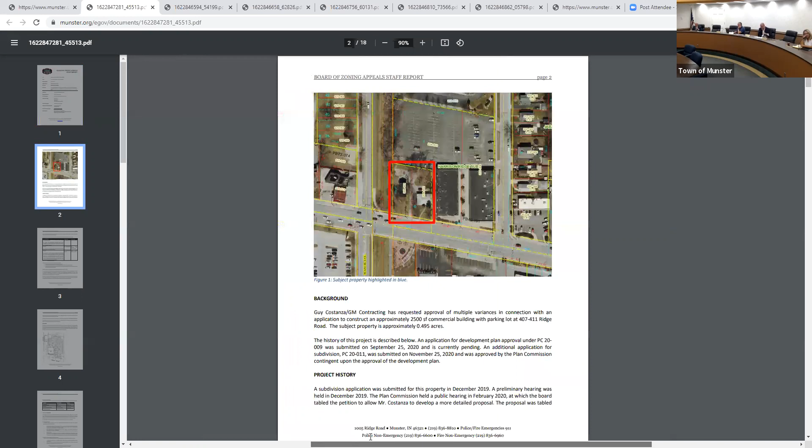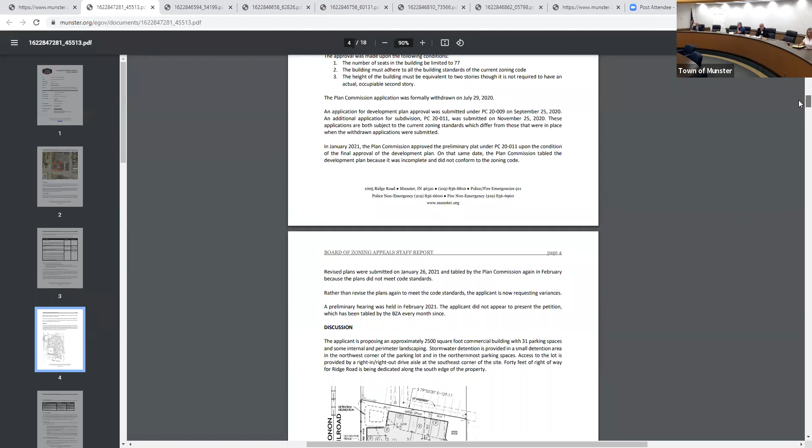The project was then brought to the Plan Commission and was not approved. In fact, it was tabled multiple times at the Plan Commission level, and then ultimately withdrawn from the Plan Commission in July of last year. A few months later, the project was resubmitted for approval to the Plan Commission.

It was noted at that time that there were a number of additional variances that would be required to build the project as proposed. You'll see here it's approximately a 2,500 square foot building located on the southwest corner of the lot with a parking lot.

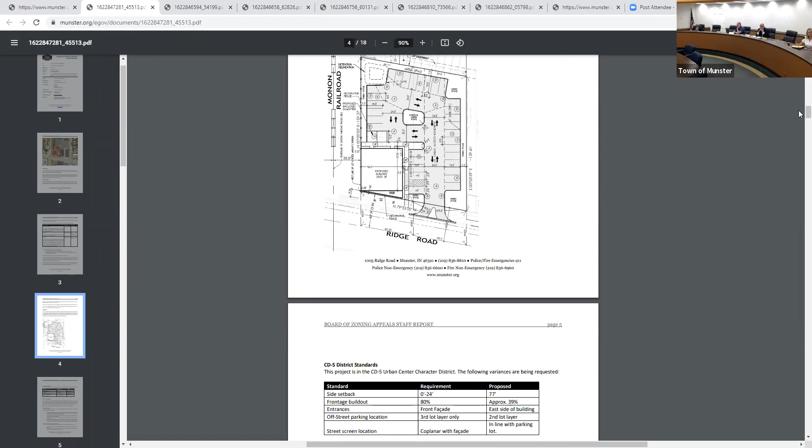The variances they're now requesting are from the maximum side setback, which is 24 feet. They're proposing a 77 foot setback on the east side of the building.

They're requesting a variance from the frontage build out requirement, which in this CD5 district is 80%. That frontage build out requirement is the percentage of the front lot line that is built out with the building, so the proportion of the front lot line that has a building adjacent to it. They're proposing approximately 39% frontage build out.

They're requesting a variance from the requirement that the main entrance of a building be in the front facade. They're proposing that it be on the east side of the building.

They are requesting a variance from the location of off-street parking, which is to be in what's called the third lot layer, 20 feet setback from the front facade of the building. They're proposing that they have parking in the second lot layer instead, which is shown here, essentially that 20 feet from the front facade back.

And finally, they're requesting a variance from the location of the required street screen, which is a screen of the parking lot and parking area. It is to be located co-planar to the facade, so if you draw a straight line across the facade, as you can see here. They're to have a street screen located right here, but in the landscaping plan they submitted, they proposed that it be here instead.

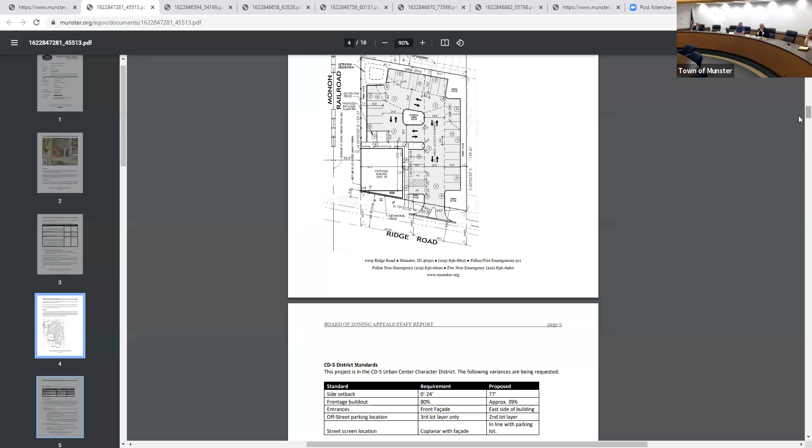So those are the variances being requested. As I said, at this time it's a preliminary hearing, so the applicant would be requesting a public hearing at the next meeting of the Board of Zoning Appeals.

I've listed for you the standards by which a variance request should be judged. As a reminder, any applicant for a variance is required to address those criteria.

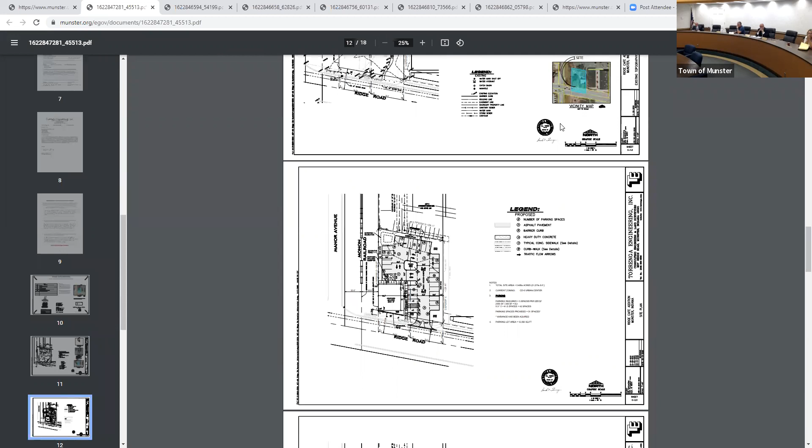I'll go ahead right now and just put the screen to the project site plan, and I'll just let you know that both the applicant, Guy Costanza, is here in the room, and he's being represented by Attorney John Reed, who is present on Zoom.

Okay, so the petitioner wishes to speak, or the counsel, Mr. Reed, wishes to speak? Yes, thank you, Mr. Chairman. This is John Reed on behalf of GM Contracting and Mr. Costanza and Mr. Krantz.

So the two proposed tenants for the building at this point are Little Italy, a restaurant located in Dyer — they want to put in a to-go facility with no live seating, basically a large kitchen with a to-go operation — and also a Domino's delivery carryout facility, roughly 50-50 of the building.

So the prior variance granted for parking limits us to 77 seating positions — maybe there will be 8, if any. So I think that's all helpful, but we think we can meet the criteria, hopefully, for the variances we'd like to see granted on the property.

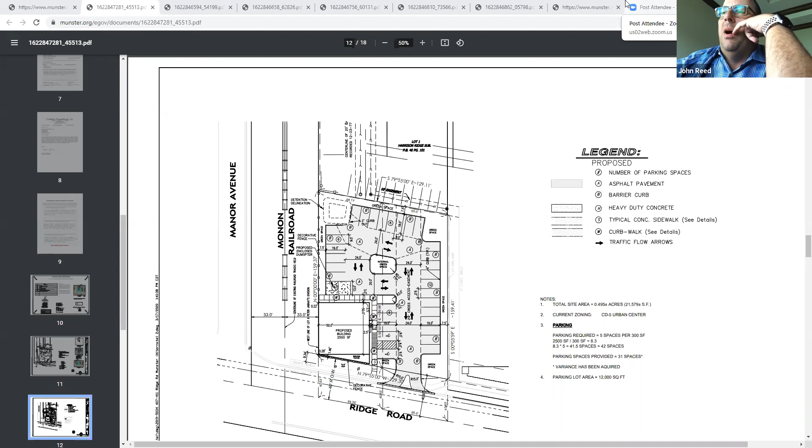And then ask for site plan approval thereafter. Really, I guess tonight's meeting is to get everybody back in tune with the project, and simply make a request from the Board of Zoning Appeals members to please place us on the schedule for the July 13th hearing date.

Thank you, Mr. Reed. Thank you. Are there any members of the board that would like to ask any questions?

Mr. Chairman, I have a question. Regarding parking, the second lot layer as opposed to the third lot layer, does the town see that as a problem with this use, or maybe a future use, with traffic backing up? People coming in and out of that entrance, as you pull in, there's no buffer zone whatsoever. You're pulling right off our apron and making a turn to park right in the spot, and cars backing in and out are the same as traffic trying to pull in there.

Mr. Raffin, if I might jump in - Tom was kind enough to meet with us last week, and we did discuss that exact issue. We're going to be pushing those first spots back, because now we're actually over parked. You can never really be over parked these days, but we'll be able to move those spots back so they don't intrude on the ingress egress. I agree that would be difficult, backing out where people are pulling in isn't very helpful.

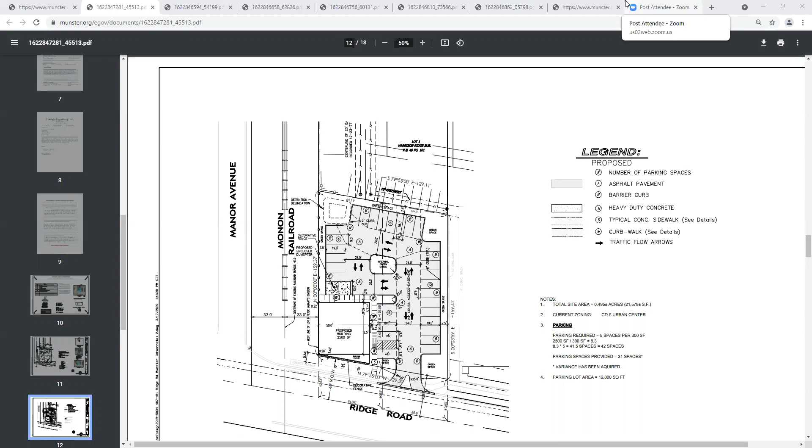Thank you, Mr. Torrenga. Does anyone else on the board have any questions of the petitioner, or comments? If not, I'll entertain a motion to set this matter for a public hearing.

Mr. Chairman, I make a motion to set this for public hearing and that petitioner comply with all town's notice requirements. Is there a second for that motion? Mr. Chairman, I'll second the motion. Thank you, Mr. Peterson.

I will call for the vote. Tom, would you please call for the vote? Sharon Mayer, yes. Jonathan Peterson, yes. Roland Raffin, yes. Chairman Friedman, yes. Very good, the matter is now set for public hearing.

We're going now to the second item on the agenda. The second item is BZA 21-004, the Good Oil Company requesting a conditional use permit. Tom, would you explain to the board what is happening here?

Good Oil Company, owner of the property at 9451 Calumet Avenue, is requesting two things, and this docket number as well as the next one are linked. They're proposing to reopen a car wash at their Marathon gas station at 9451 Calumet Avenue. There are two actions associated with reopening the car wash. The first is this docket 21-004, an application for a conditional use permit. A car wash is considered an auto-oriented use in our zoning ordinance, and in a CD 4A district, which is where this is located, that is a conditional use.

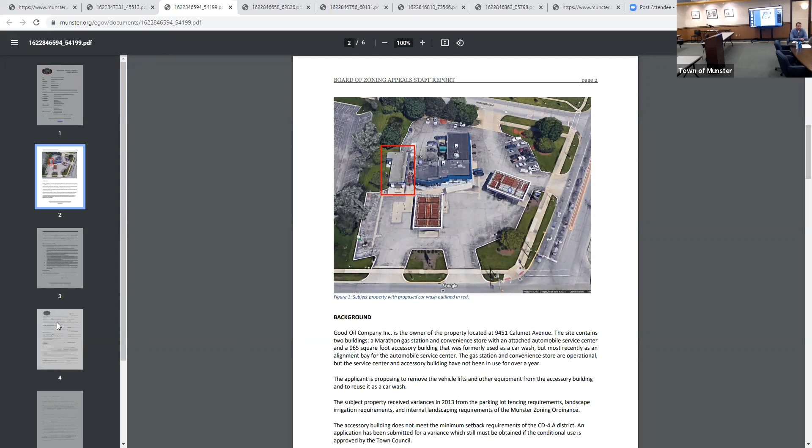If it's okay with the chairman, I'll briefly describe the variance involved as well. Not to jump the gun, but the building itself does not comply with the minimum setback standard. So it's also going to require a variance. An accessory building is to be located in that third lot layer, 20 feet back from the front facade of the primary building. This is essentially at the same setback, so it doesn't comply with our setback standards, and it has also expired as a conditional use.

A conditional use is a permitted use under certain circumstances, listed here in the staff report as the criteria for approval. The Board of Zoning Appeals needs to determine whether or not these conditions are met with this use, and then make a recommendation to the town council—favorable, unfavorable, or no recommendation. A public hearing is required for this action, and that would be the request tonight: to grant a public hearing.

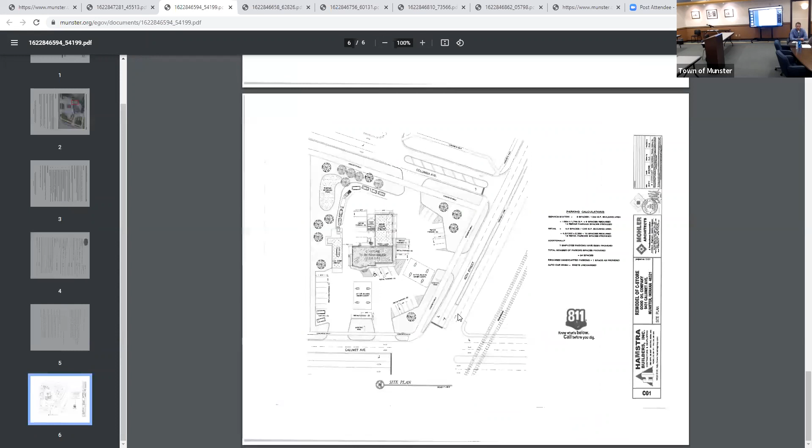I will show you one more exhibit, which is the overall site plan for the property. This is a site plan that was approved by the Board of Zoning Appeals some years ago in connection with the development plan approval. As you can see, because it was formerly a car wash, the site still is such that it can accommodate the car wash. There's substantial stacking space for cars, and there's sufficient access from Calumet Avenue and Columbia Avenue to the site.

So they're not proposing any additional improvements beyond just the interior remodel of that building into a car wash. That being said, I do believe we have representatives from Good Oil on Zoom, if you'd like a presentation or to hear anything further.

Thank you, Tom. I will allow the petitioner to speak. Please identify themselves and tell us what you would like. Thank you, Mr. Chairman. Can everybody hear me? Yes. My name is Justin Schramm.

I'm the corporate attorney for the Good Oil Company. I also have with me here Chuck Ryan, our Chief Operating Officer for the Good Oil Company. I want to thank everybody first and foremost for your time this evening.

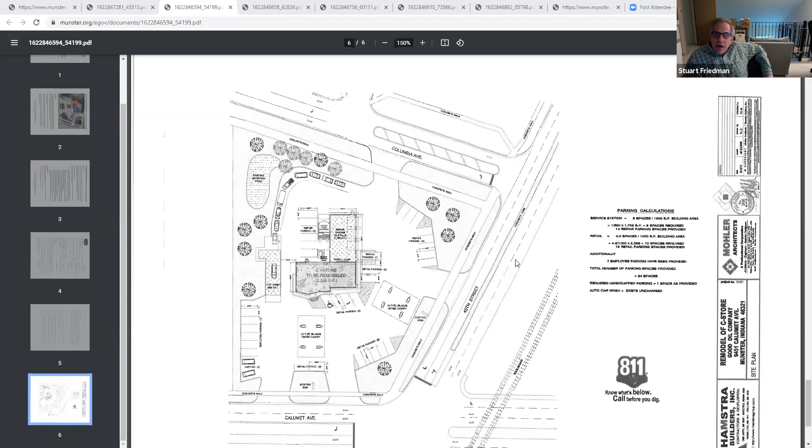So I have a question. I haven't been by the Marathon site since they changed 45th. Are you still selling gas from that site at this point? Yes, sir. Okay, so it's your intention to operate the car wash facility and dispense gas? Yes, sir. Okay, I just wanted to clarify that.

Mr. Chairman, I've got a follow-up question to that. I thought I heard Mr. Ryan say they're planning on tearing the facility down and rebuilding completely. Why are we doing this tonight? We have a dated rendering. It sounds like they're just testing the waters here, and what they really have in mind is something completely new. Why don't we just cut to the chase?

Mr. Ryan, if that's what you're planning, why don't you submit a rendering of what you're contemplating so we can look at it and decide whether to approve it or not. I think let's just go straight to what you're intending rather than come at this from half measures.

Well, we're in a contractual obligation there with a lessee that has four years left on the contract. We don't have the ability to take it over as the Good Oil Company. Once that occurs, then we would, but unless we can figure out if the lessee can survive there without the car wash, we can't survive the way it is right now. It'll just linger on.

So for us to be able to determine whether it has the value to raze and rebuild it, that's 4 years down the road. So there's really not a point to that at this juncture.

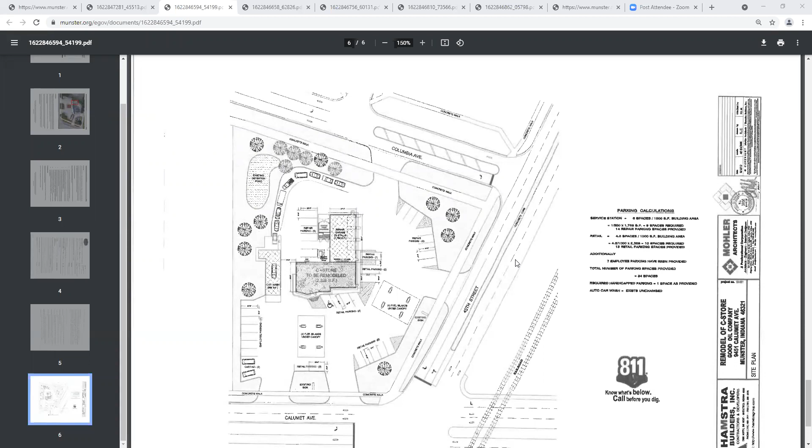I don't know that we portrayed this as a gem. I think one of my first statements was that we realized there had been activity in the past, and especially to the site plan committee - I think Tom can probably attest to that - we understand there's things that's happened on this property that quite frankly isn't conducive to our business model, a family-owned business, and we want to do better. We do. You've undertaken a lot of cost, expense and time, and even the fact that you're sitting there in that room having this discussion with us is a testament that you want to better this area.

So again, it's something we've talked about. If it's a conditional improvement of use for a year period or 18 months, to show that we can follow through and improve the property, I think we'd be amenable to that. But again, we do understand that there has to be some trust that needs to be earned back. We realize that. Thank you.

You don't earn that trust after 18 months and the car wash conditional use is taken away. Would you recommend taking down the structure and restoring it to pavement or landscaping?

Well, it's certainly something - I don't want to bind the executive committee because we do everything by majority vote, but it's certainly something that could be a matter of contract. If the only way this is going to be approved is conditioned upon improvements to the site, and if that doesn't happen there are certain conditions subsequent that'll need to happen, then that's something we can include as a matter of contract. Again, I would defer to your legal counsel on whether we can do that. I've not dug into the subject specifically, but it's something we would be happy to take back to the executive committee and see what type of commitment we would make to do that.

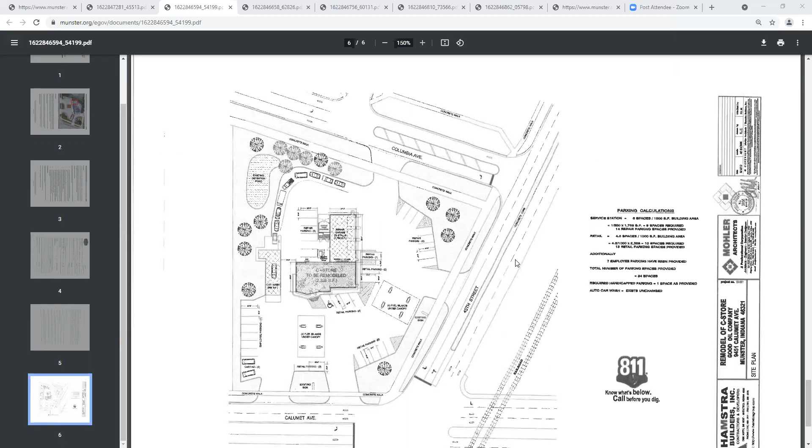I'll entertain a second for that motion. Is there a second? Mr. Chairman, I'll second that. All right, then I call for the vote. Tom, would you recite the roster, please? Sharon Mayer, yes. Jonathan Peterson, yes. Daniel Buxa, yes. Roland Raffin, yes. Chairman Friedman, yes. Motion carries.

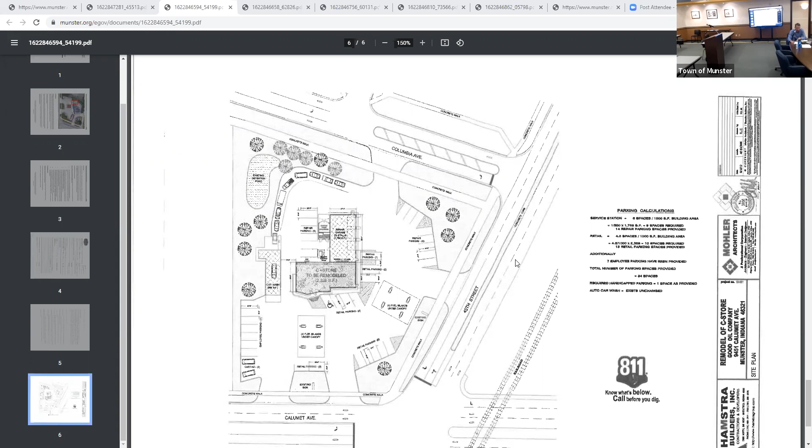And just to clarify, that covers two separate public hearings: the first for BZA 21-004, which is a conditional use permit request, and secondly BZA 21-007, which is a request for a variance from minimum setback standards.

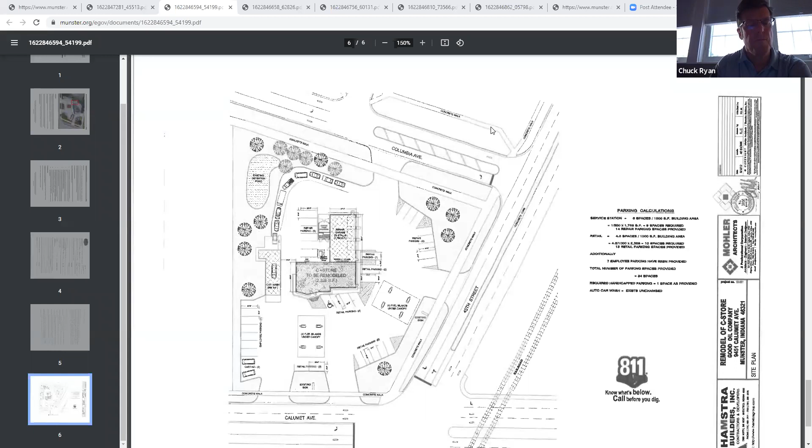The next item on the agenda is, I believe, Smoothie King, Mr. Parth Patel. This is BZA 21005. Tom, would you explain what this is all about?

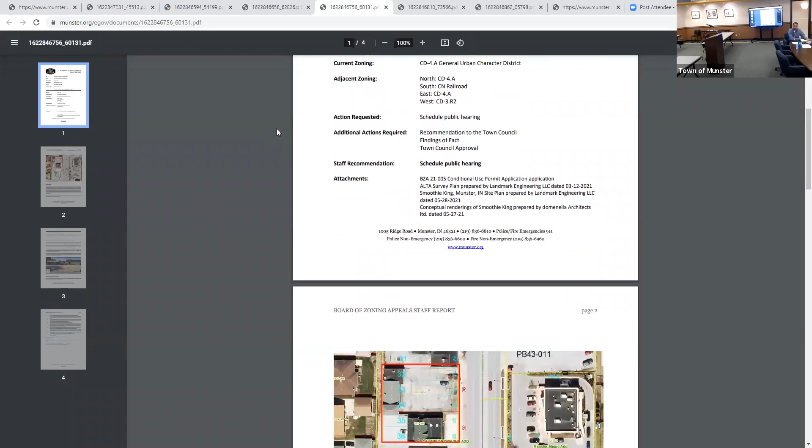Yes, similar to the last two items on the agenda, there are three related items related to a single project, which is the redevelopment of 8130, 8138 Calumet Avenue — I'll apologize, there's an error in the agenda, it says 830 to 138, so that's a typo there. In any case, this project is a proposal to consolidate those two lots and construct a single Smoothie King restaurant on the two lots with a drive-through and a small parking lot.

There are three applications connected to this. The first is for a conditional use permit for a drive-through in the CD4A district — a drive-through is permitted, but only under certain conditions. The second is for two variances: the first from the minimum parking ratio, and second for the maximum number of curb cuts. And then the third application is for a conditional use permit for an outdoor dining patio. So the conditional use permits each have their own unique sets of criteria.

The variance is a different set of criteria, but in any case...

The site is located here, 8130, 8138 Calumet Avenue. Currently there are two vacant buildings. This building is the former Soul Spa, which has been vacant for many years, and this is a former Munster Animal Hospital. Both properties are owned by Bruce Boyer. The applicant is Parth Patel, a developer who I believe has a contract to purchase the property.

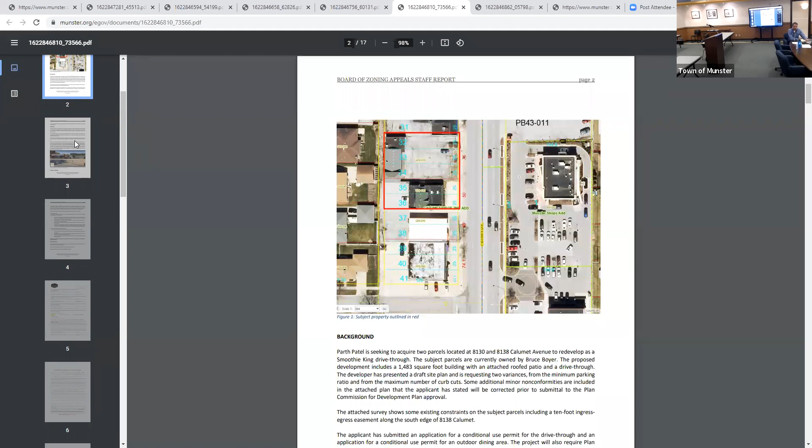I will go through each of these petitions and describe them a little bit for you. Let me pull up the site plan.

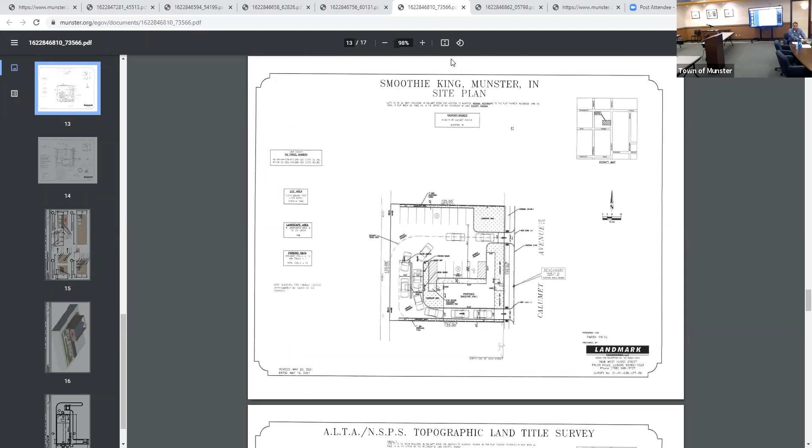The proposed site plan has a small building located on the south part of the site, with a covered patio area extending off the northeast corner. There are two curb cuts. The north curb cut is entrance only off of Calumet Avenue. Vehicles enter, line up in two queues to place their orders, and then exit along the south side of the building onto Calumet Avenue.

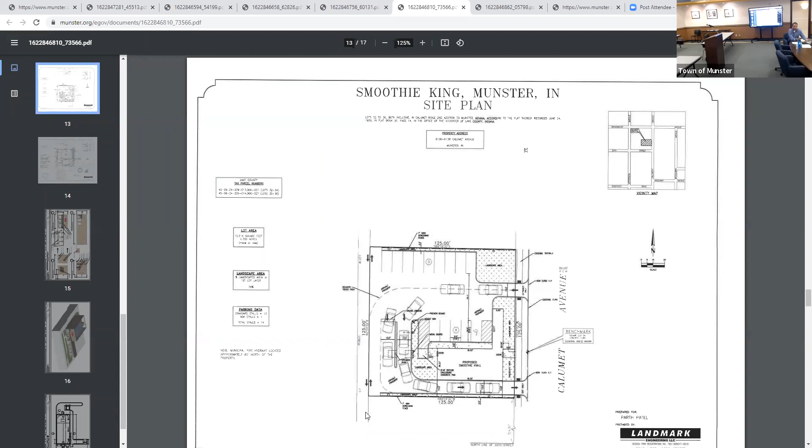There are a few items to note on this site plan. First, there's a proposed exit to the south along a town-owned alleyway, which runs parallel to Calumet Avenue up to 30th Street. And then there's also a 20-foot... I see this is actually not the most recent site plan that has been provided. Let me see if I can pull up the most recent one.

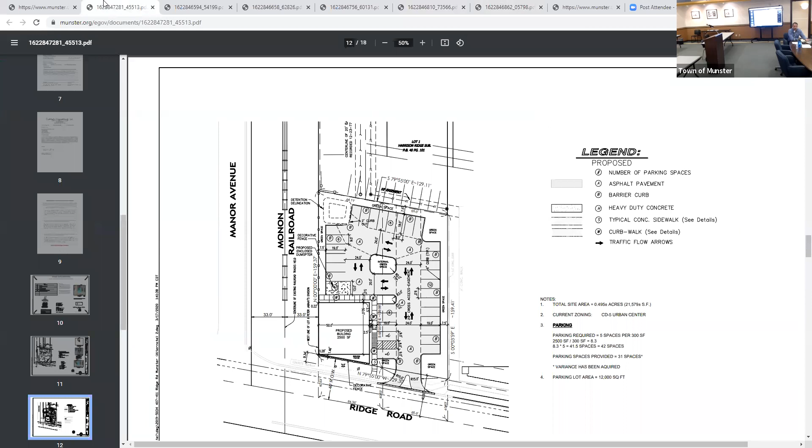This one—because I'm not seeing the correct one here.

There's a 20-foot easement as well along the south side of the property, 10 feet on the applicant's property and then 10 feet on the property to the south, and that's for a shared driveway.

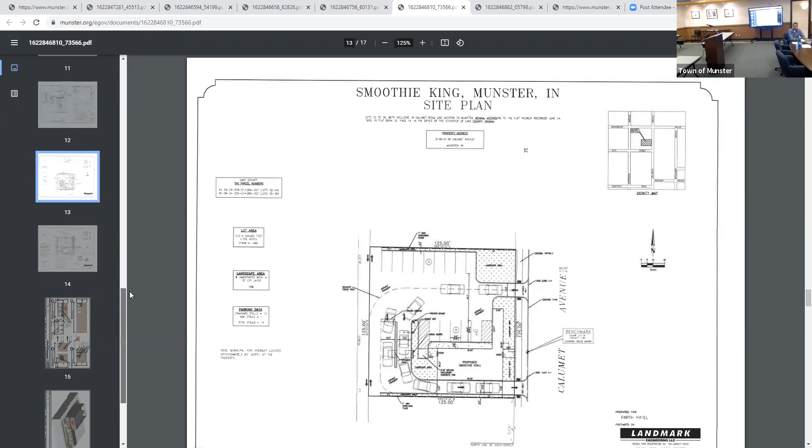So the proposal is—I'm sorry, this is actually the wrong site plan that I'm showing here. Let's see, it's one of the other ones.

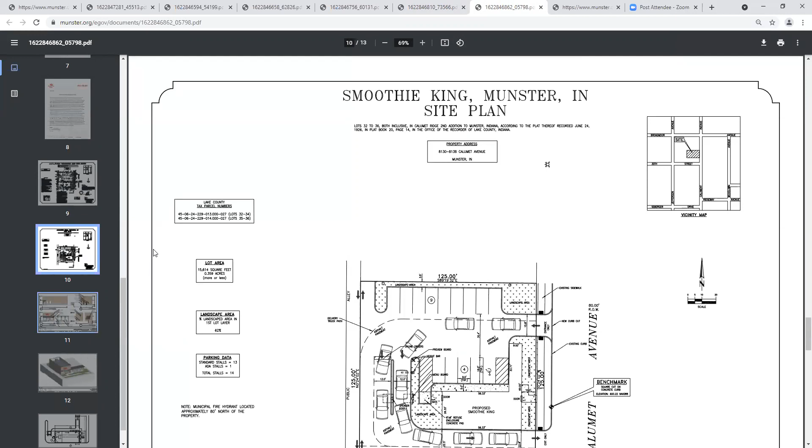Tom, is the one you're looking for dated May 28th, 2021? Or should it be June 7th? Yeah, it's literally a brand new one that I sent to Tom a day or so ago. That one didn't get put onto the agenda because it was sent this week, but this is the most recent site plan. I apologize, one of the staff reports has a previous version.

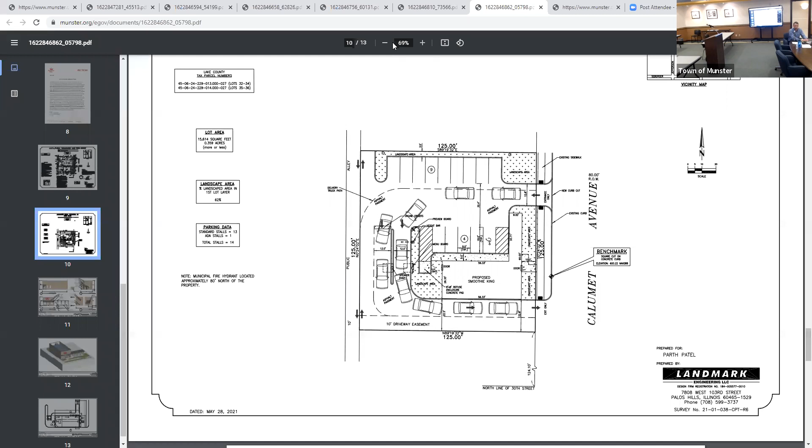Pull it up, Tom, so I can see. Tell me what changed as you're going through it between the ones that we have and what you have. So this is on the website, it's just under one of the other staff reports.

I'm looking right now at the staff report for the conditional use for the outdoor dining patio. But again, the building is here. The thing that's changed from the other site plan is that this one shows a 10-foot driveway easement along the south edge. So there's a 20-foot driveway easement total, 10 feet on this property and 10 feet on the property to the south.

So the plan shows the exit of the drive-through not on that easement, but on a dedicated drive aisle exiting out to Calumet Avenue. This remains clear as a bypass lane. What you don't see here, which is on the site plan sent this week, is the other 10-foot easement on this property. So the plan hasn't changed, it just shows that easement and the building to the south.

So what you have here is a 32-foot driveway.

That being said, there are variances being requested for the number of curb cuts, which in this district has a maximum of 1—they're proposing 2. There's also a variance being requested for the number of parking spaces. They're proposing 13, and the required number would be 24.

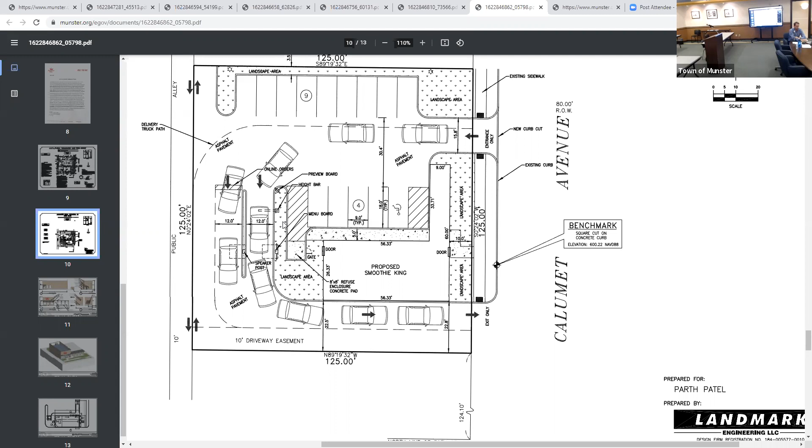Now, the applicant has provided some additional information from his other stores that I'd like to explain today, which talks a little bit about how many parking spaces he actually needs. But the proposal is to have the vast majority of customers using the drive-through lane.

The other conditional use that I mentioned is for this outdoor dining patio. This was something added onto the building in order to meet our frontage build-out requirements. So while it's there, it's not intended to be used as an integral part of the restaurant—it's going to be more of an accessory to it. There will be no table service or anything out there. In fact, the furniture hasn't been determined yet, so whether there'll be tables, chairs, benches, or counters hasn't been decided by the applicant.

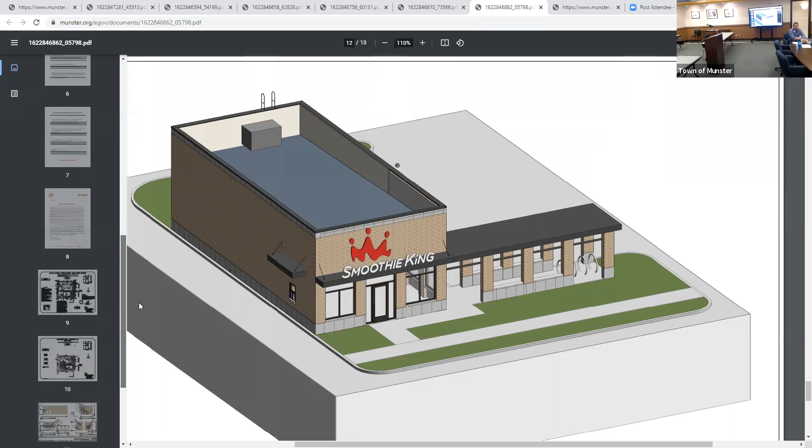Each one of these items requires a public hearing. So tonight you're being asked to grant three public hearings—one each for the conditional uses, and one for the variances. Ultimately, the conditional uses each require approval by the town council as well.

With that, I know the applicant, Mr. Parth Patel, is on Zoom and able to give a more detailed presentation. Thank you, Tom. Mr. Patel, would you like to speak to the board, please?

Yes, thank you. So a few things I wanted to clear up. Basically, that southern curb cut that's going to be 32 feet wide that we're proposing—I spoke with the southern property owner, Fred Baker, and they mostly use that driveway currently as an exit onto Calumet. A lot of their clients and employees use 30th and come up the back to actually park at their site, so they're mostly using this driveway as an exit, and that's how we're trying to propose it—as an exit only. I know Tom earlier said we would be using that easement in the back to go north and south. With the widened curb cut, we would literally just be using that secondary curb cut as an exit point for both our clients and the southern property.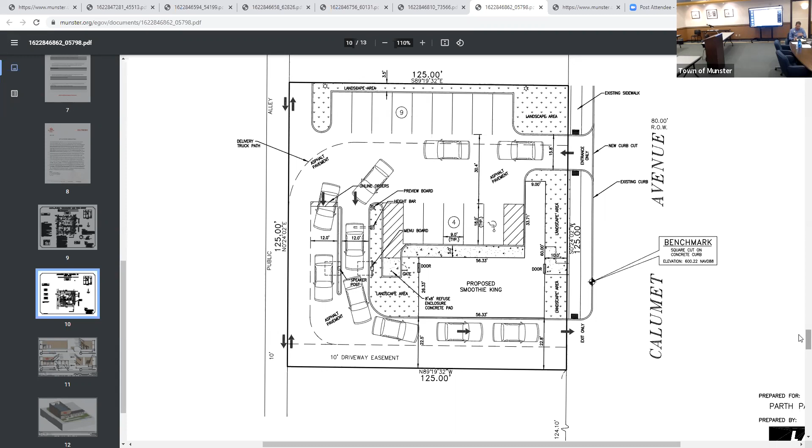I just think it's a tough fit in this thing, and I've been stacked up way too many times in the Dairy Queen. The Smoothie King is a healthy base product. I think people can make a few more steps to walk in your door.

Can I make a comment on what you just said? Yeah, so the reason why we're showing the 2 menu boards is typically the car stack that's required for even a busy store is about 6 cars. We're trying to alleviate any pressure by having the additional menu board to service guests even quicker. So technically we would be able to have a stack that's almost double what a typical drive-through Smoothie King would have, to prevent any kind of backward stacking or pushover or fall over onto Calumet Avenue.

And as far as your parking incident goes, I spoke with Tom about that in the past. That's why we tried to leave a larger gap. If you take a look at the parking spaces in between, we have a 30-foot clearance, meaning if there was a car literally behind the other car in that drive-through menu board, you would still have enough lane to actually maneuver into a parking space.

So we did try to account for that because, as you stated, that development across the street that Bruce Boyer did, I've been to that site a few times as well. The parking situation is not ideal there. I understand that people are able to get in and out, but to avoid that struggle of having the congestion of getting in and out, we try to leave a little bit more clearance room in there. And that's why we add the additional menu board to help with the car stacking.

And I did speak with Bruce. He was planning on using both curb cuts because the site as is, there's one curb cut for the spa and there's this additional curb cut that's part of this easement for the pet hospital.

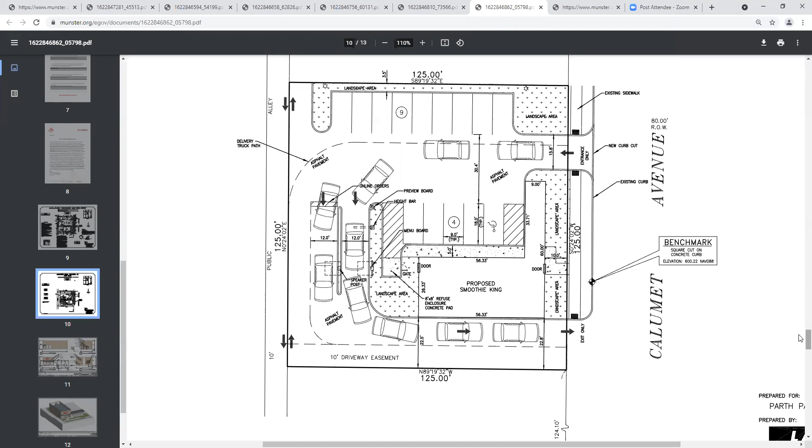Sharon Mayer, yes. Jonathan Peterson, yes. Daniel Buxa, Roland Raffin, yes. Chairman Friedman, yes. Very good.

Mr. Patel, we look forward to seeing you at the next meeting, and hopefully we can come to a resolution of all this. Thank you.

All righty. Next on the agenda, let's see.

We had a public hearing for B Core Corridor Chicago. Is it my understanding that Kimley-Horn has requested another continuance?

Yes, I spoke with the representatives from GE two weeks ago to determine whether they were going to present their petition tonight. They indicated they are still interested in doing the project. However, they had scheduling conflicts and weren't able to be here tonight, but they plan on attending the meeting in July and presenting their findings requested by the Board of Zoning Appeals regarding how operational changes have alleviated some of the congestion at their facility at 475 Superior. So for the time being, they are requesting another continuance.

Okay, do we have to act on a motion for that continuance, Mr. Wickling? Mr. Chairman, before I make a motion, Tom, I just want to urge - obviously construction cycle is here. Getting into July, if we're planning on having them go through this project, we don't want to be in October, November, close to winter season, when they can't do concrete paving.

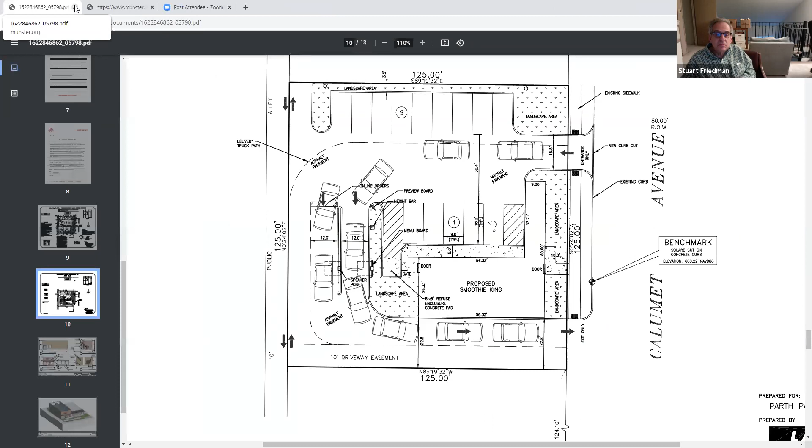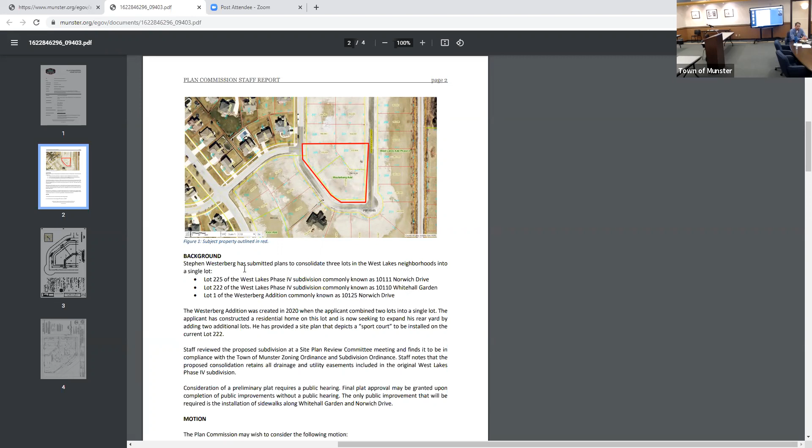All the public improvements have been completed in connection with West Lakes Phase 4. The only exception being sidewalks, which are typically constructed at the time that a residence is built. And he's provided a plat of subdivision, which is shown here.

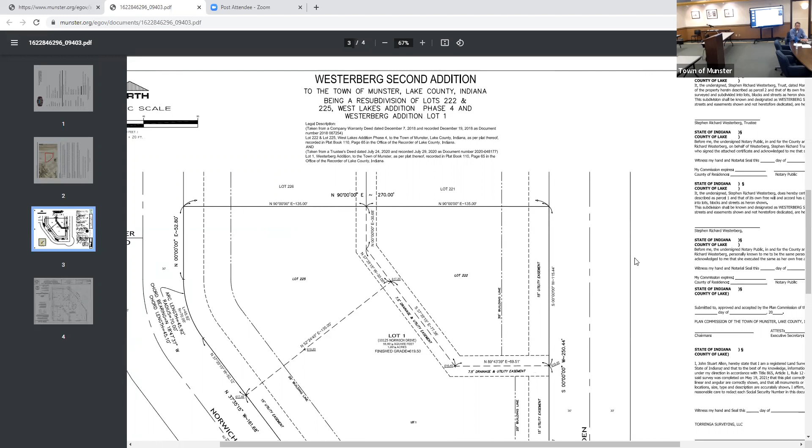Zoom out so you can see the proposal. Of note, this has been reviewed by our town engineer, and he's retaining all the existing drainage easements, which do have some surface drains in them. So that will be maintained both with the consolidated lots and with any future construction built on the lots.

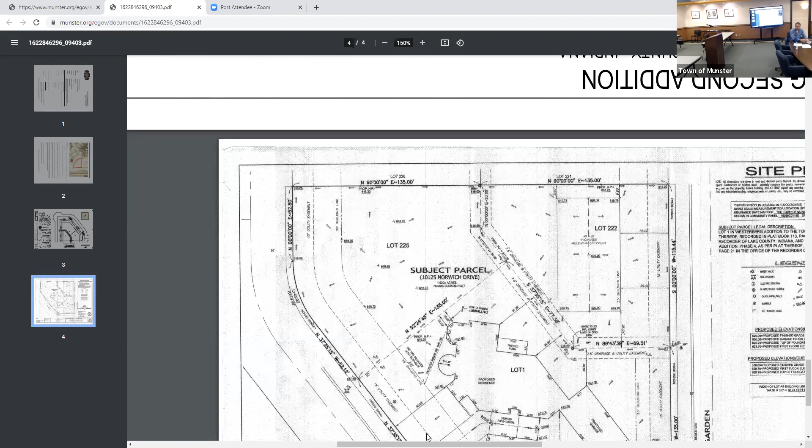Also provided a site plan, which was provided to us, so you can have a sense of the end plan for the property. The existing home that's under construction is shown here - it might be difficult to see, but that's being constructed on the previously consolidated 2 lots. This is the second lot and the third lot that are proposed to be added.

And there's a proposal here for a sports court. He's also provided some additional renderings of backyard features like patios and gardens and a putting green over here on lot 225.

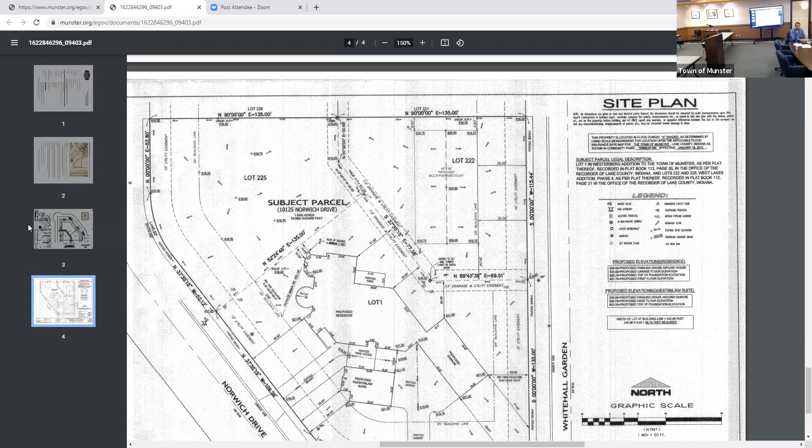So I'll just mention that this is a preliminary plat. It requires a public hearing, so we will need to request that tonight. He'll post legal public notice of the public hearing that'll be held next month, and he can have preliminary plat approval as well as final plat approval next month, if the board agrees to it. Thank you. All right, bring it back to the board.

Any comments, questions, statements? Mr. Chairman, just one comment. Tom, does this all meet the local covenants for the subdivision as well? That's a good question. We did refer him to John Reed and Brian Specs, who we've been informed are the administrators of those covenants. I don't know, the applicant is here. I don't know if he met with them or not, but...

That's something that they will have to determine. It can happen whether or not - I mean, the subdivision can happen whether or not his ultimate build-out proposal meets those covenants, because there's really no reason why he can't, if he's meeting our subdivision ordinance, consolidate these lots and expand his own lot. So I have seen some of the renderings of his proposals. I don't know if it meets the covenants. My hunch is that it may not, but that's why we referred him over to the West Lakes to get that confirmed.